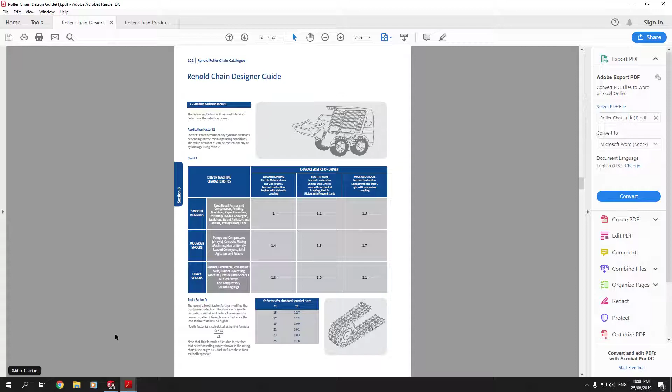First of all, not sponsored by Renold, but we're using Renold's design because they provide free PDFs, a design PDF for the chain, and they provide the dimensions as well. That's why we're using Renold, but there are other companies. If they provide free step-by-step design and dimensions, you're free to use them. But today we're just using Renold.

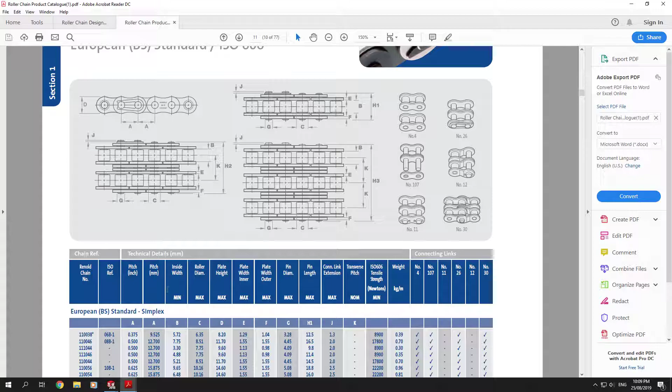So first, draw a chain path. Mine's just an oval shape, and this is once you've done the calculations by the step-by-step PDF.

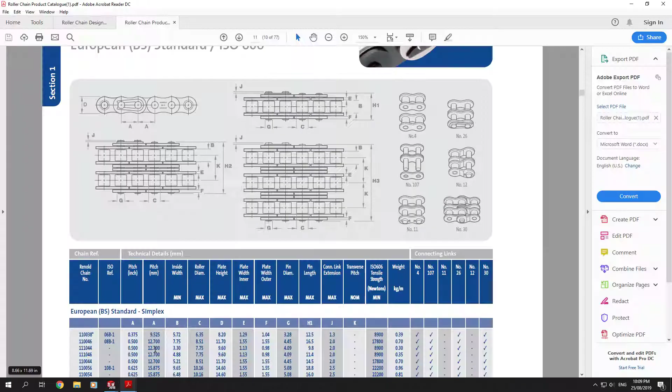You draw the plane and then you've got a sublink, which is just basic parts provided by the dimensions here. As you can see, it's just a roller, a pin, inner link or inner plate, and outer plate. All these dimensions come from the PDF.

For this bit they didn't specify, so what I did was I added a third circle and just trimmed it to make it all nice and smooth.

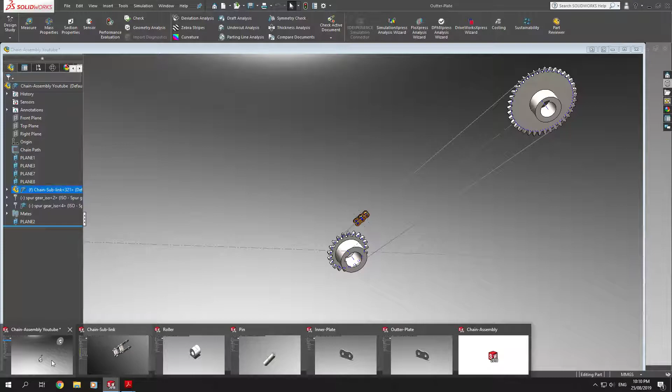Once you've got your pieces, you add them into an assembly and you get a sublink, a sublink assembly, which is what I've got here. Once you do that, you just put it into another assembly.

Now what you do is just click the chain pattern. For my chain, it's going to be running on sprockets, so we're going to pick the third one. Depending on what you need it for, you might choose other ones.

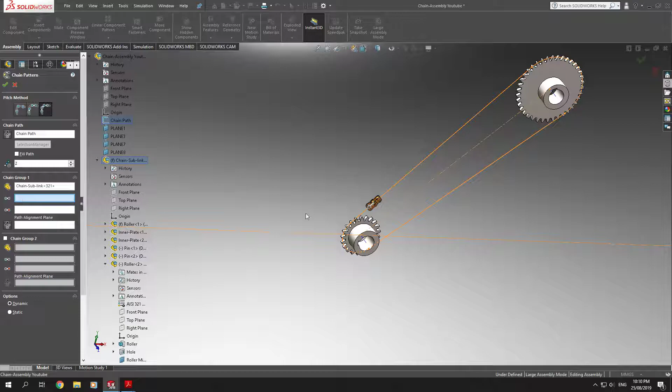It says click the chain path, so we'll just click our chain path and then we'll do filling later. Right now we want to pick our axis.

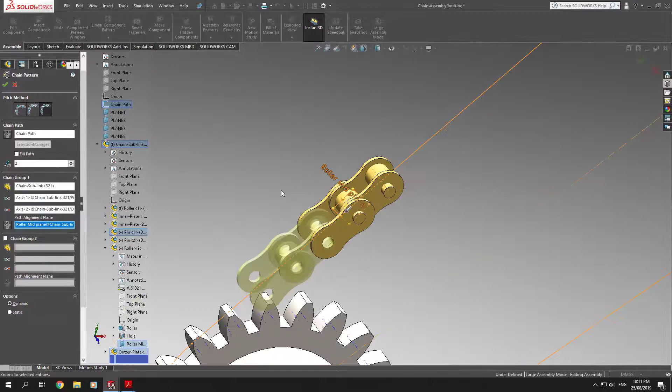Next, we want to pick this axis. It might be a little hard to see. Now for path alignment, I've just made a mid-plane on my roller mid-plane, and now you can see it's got a preview of where it's going.

Now for fill, you can go auto fill path, but for some strange reason mine doesn't auto fill, so I just add an extra link to fill it. And that's your chain assembly done.

As for your sprockets and gears, pinion I guess, what you do is just go to design library, toolbox, ISO. Again, you've got PDFs that allow you to figure out and calculate what sprockets and gears you need, so just follow those PDFs. Go to ISO, then power transmission, gears, and then you just drag and drop.

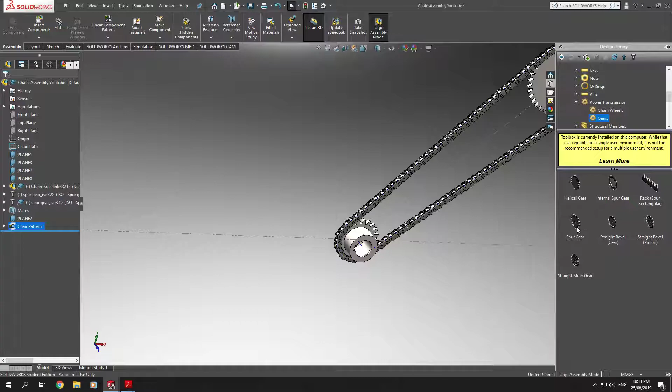And then here we go, that's your thing. So again, you should have your dimensions from the PDF, and you can calculate your module from your... I believe it is pitch divided by radius? Nope. Well, anyways, it's in the PDF, so I forget.

That's why I always refer to the PDF. And then number of teeth. Oh yes, now I remember, so it's actually your pitch radius divided by the number of teeth. So in this case, this will be whatever the number divided by, I think, 21. So we get like 5 or something, and 21.

For our chain, it was 9.525, and this allows you to get a hub to support the shaft. Pressure angle is normally 20, we hardly use 14.5. Yeah, anyways, so you should get something like that.

And then once you do that, you just align that with your chain, so they're centered and they move accordingly.